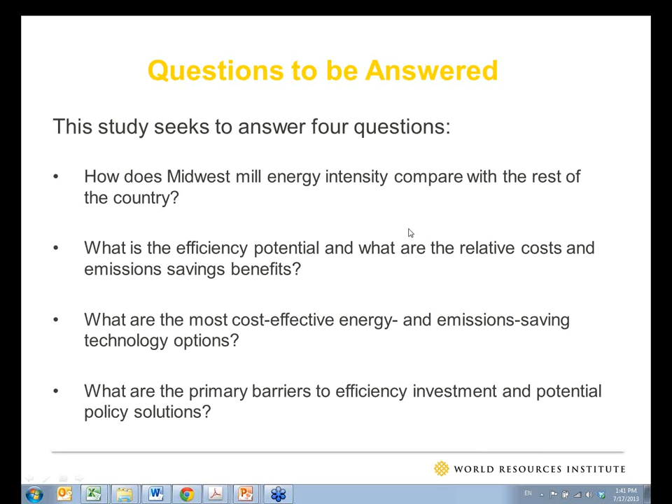And then in the last part we looked at the primary barriers to energy efficiency and the potential for policy solutions. So go to the next slide.

So for today's presentation, I already went through the questions, and then Nate will start with a bit of background. We'll go through a benchmarking and emissions inventory that we conducted based on mill-level data from the Fisher International database, and also the greenhouse gas emissions inventory from that.

We looked at the energy efficiency options, as I mentioned, quantitatively and qualitatively, and then the next part is case studies, which really present the business case to demonstrate why these efficiency options are viable and illustrate the role of policy. And then we finish with the policy landscape and a series of recommendations.

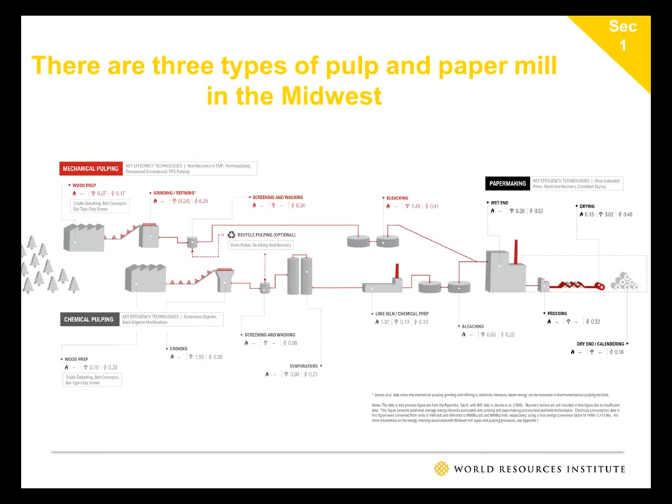So what you can see with those numbers under each process is the final energy intensity of these processes using the best available technologies. The first number with the flame is direct combustion of fuel in the facility. The second one is steam consumption, and the little lightning bolt is electricity consumption.

In terms of the questions that James opened with that we were trying to answer with this report, the basic approach that we took was benchmarking and creating an inventory of all of the greenhouse gas emissions related to pulp and paper mills in the Midwest. There are a number of known issues with benchmarking, namely defining the product or sector, the methods and boundaries that you use for calculating, the units that you use for normalization, the level of ambition for the benchmarking, and finally the data sources. So there's a lot of problems that go into benchmarking that we had to address.

The usual simplistic approach to benchmarking is just to put entire sectors together and say, well, the average intensity is this, and it'd be great if all the mills could move to the average intensity. This approach doesn't work with pulp and paper because you've got a range of products from tissue paper to cardboard to coated paper, all kinds of products. And you've also got those different production routes that I showed in the earlier figure.

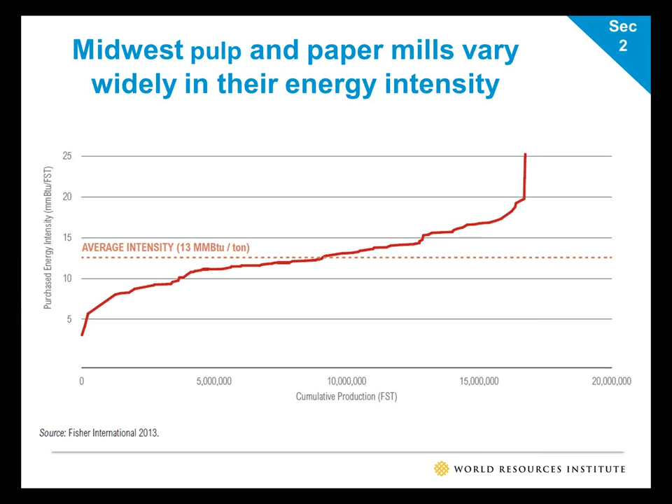So this figure here shows the range of intensities that we found among the different Midwest mills, but like I said, it's really apples and oranges in terms of showing a lot of different types of production methods together in one. So we had to figure out a way to address the large diversity of production methods for pulp and paper production in the U.S.

The way that we did that was we obtained data on all of the pulp and paper mills in the Midwest from Fisher International, and we used those data in a spreadsheet tool developed by the EPA Energy Star program called the Energy Performance Indicators tool. The EPI tool was developed by the Energy Star program based on census data that account for all of the different facilities throughout the U.S. The purpose of the tool is to separate out facilities by their production method and by the product mix, so you have more of an apples-to-apples comparison.

These EPI tools have been developed for pulp mills and integrated paper mills, so they're not available for paper-only mills. We used those publicly available EPI tools to assess the pulp mills and integrated pulp and paper mills in the Midwest, and this figure shows the results of that assessment.

The way that the EPI tool works is that a given facility enters its location, and it also enters the production amount per year for that facility in terms of different production mix, whether it's coated paper or tissue paper or cardboard, etc. It also enters the amount of energy purchased at that facility for final energy use. Once it has those data, the EPI tool gives three results.

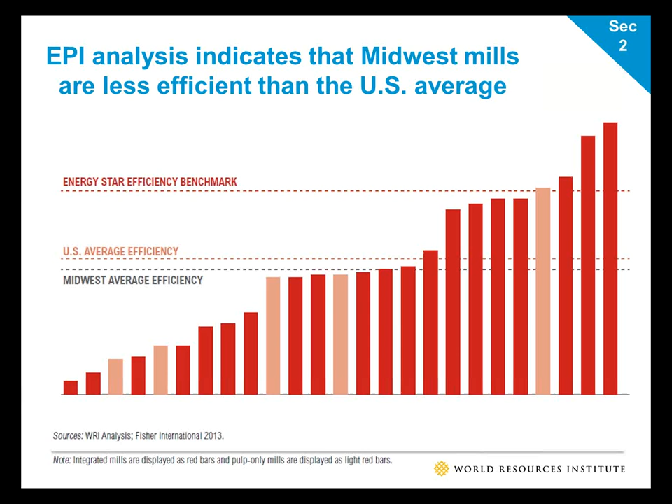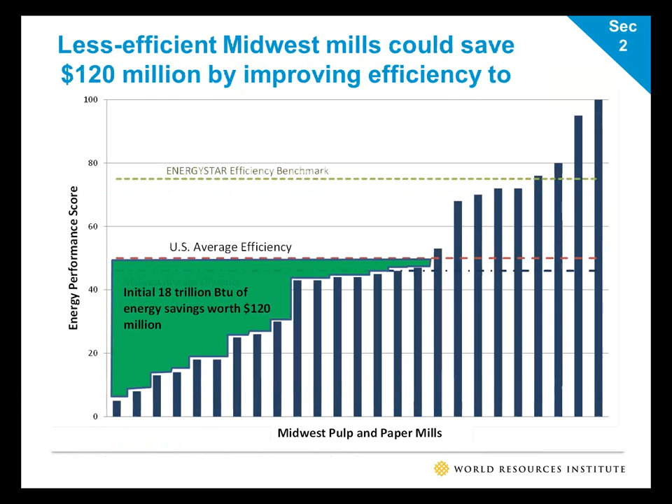If all of the mills in the Midwest that are below an EPS of 75, that is the 21 of 25 mills, improve their performance to that EPS of 75 level, the energy savings would double. So you'd have an additional 18 trillion BTU of energy savings, and that would be worth a total of $240 million per year in annual energy cost savings.

So this is one of the core findings of our report. And it shows that there's really a lot of potential for increased energy efficiency among these mills assessed against currently available technologies. And so you can see there are some mills in the Midwest that are at this level. These 4 mills up here in the upper right of the figure here. And those mills are showing that this is really possible and that these savings can be achieved.

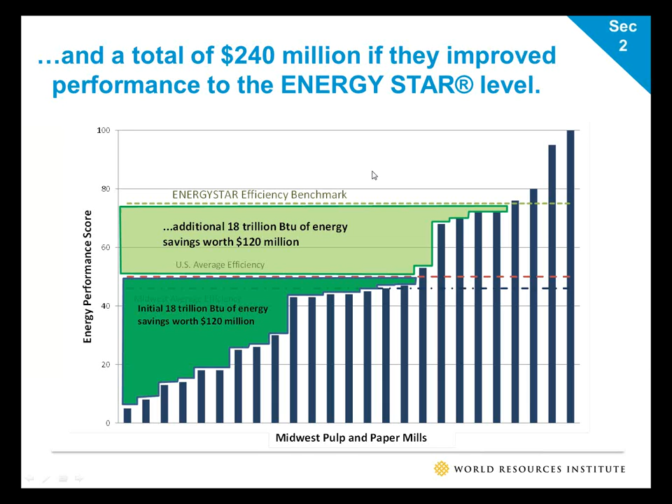Here we go. As James mentioned, the other aspect of our quantitative analysis here was to do an emissions inventory of these mills and their emissions in 2010. And so we used a tool developed by NCASI, which is a group that's related to the paper and forest products industry in the U.S. And we calculated 3 scopes of emissions.

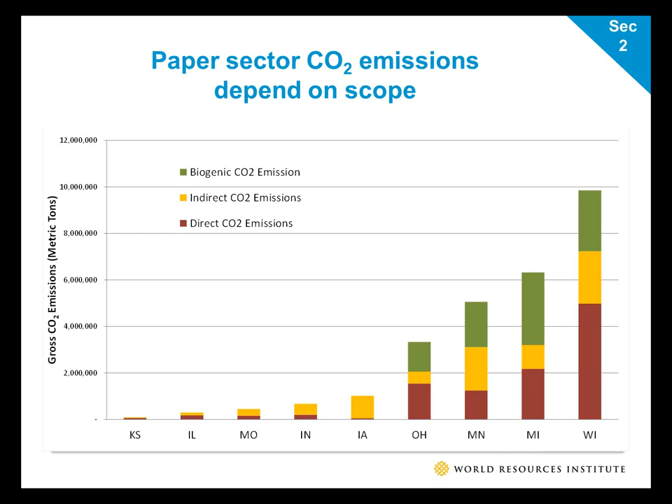One thing to note here is that on-site energy is 65% biofuel, from byproducts of trees, and so it is a very large component of overall U.S. pulp and paper energy use, but the Midwest is a little bit more fossil fuel intensive than the rest of the country, so it varies somewhat.

One of our questions in looking at emissions was, what's the impact of energy efficiency versus fuel switching? Because obviously with low natural gas prices, a lot of facilities are thinking about trying to increase their use of natural gas. And so what this figure shows is our simple analysis of scenarios here. We took the 25 mills for which we had EPI data that I described above. Only 7 of those 25 mills actually use coal or oil on site. So the rest of them have already reduced or just never did use coal or oil on site.

So among those 7 mills, if they took all of their coal and oil use and switched it to natural gas, it would reduce their total emissions by 19%. If instead of doing that, they improved their facilities so that they reached the Energy Star level of performance, they would reduce their energy use by 34% and their emissions by 34%. So this just shows that the energy efficiency potential here has large emissions reduction potential as well. These are shown separately for analytical purposes, but obviously it's great if they can both happen at the same time. That is, efficiency and fuel switching are by no means exclusive, and in fact, it's great if they go together.

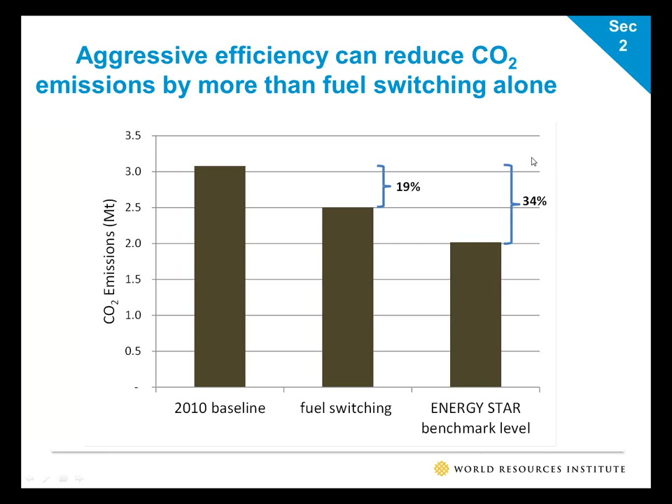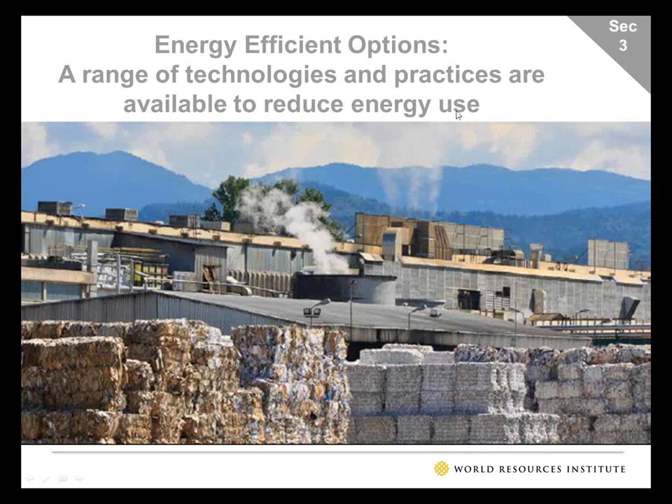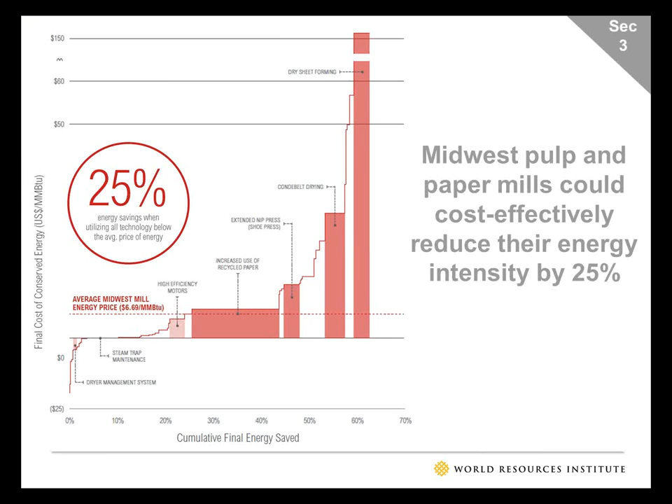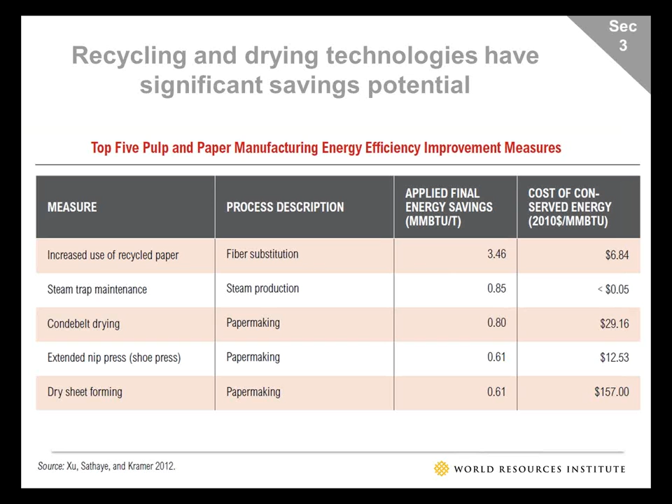What's notable about that facility? So they made a large investment in their thermomechanical pulping unit to reduce their electricity demand, and what's notable is that they were able to collaborate with their local utility, which is the Bonneville Power Administration, to really make that investment happen and to allow the benefits of the investment to be shared.

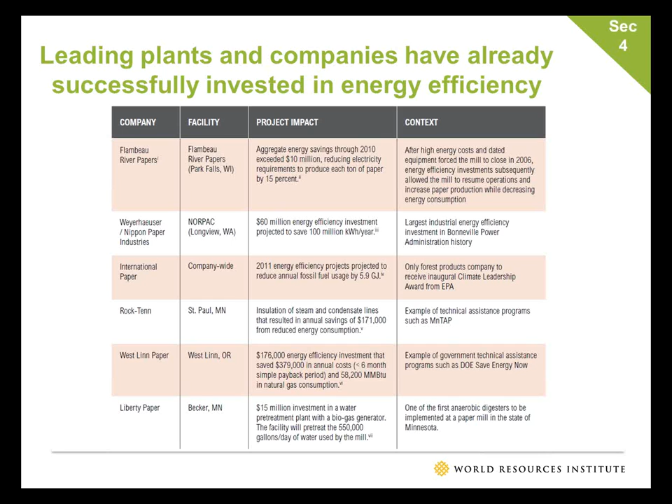Just in general, the three larger benefits that we see with efficiency investments, and particularly in the case studies, is first the jobs benefit, in that these investments can allow the facilities to successfully compete and to stay around or emerge from bankruptcy, and so obviously that preserves the jobs associated with these facilities. In the US, there are 350,000 jobs associated with the pulp and paper sector, and so this is one way to help preserve those jobs.

A second benefit is just the overall economic benefit of reducing energy costs and improving competitiveness. And then finally, there are the energy and environmental benefits of reduced energy demand and reduced greenhouse gas and other emissions. So now I'm going to turn it back to James for a discussion of barriers and policy recommendations.

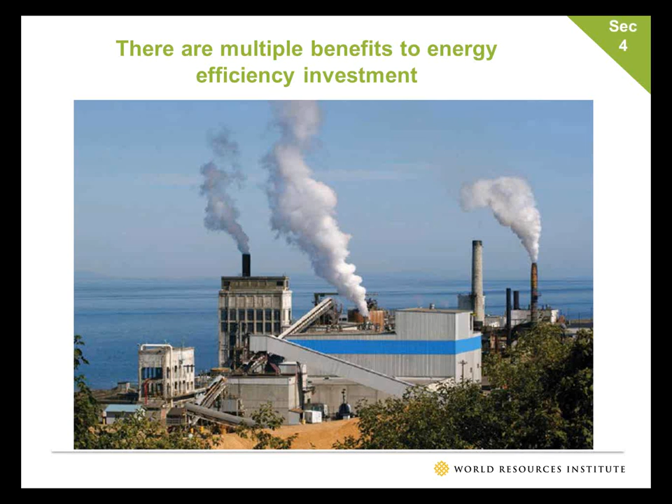Great, thanks, Nate. So the moment you've all been waiting for, the policy implications of our study. I'll be going through first a little bit of background, or I guess the landscape for policy, the policies at the federal and state level that affect this sector, and then also our recommendations and final conclusions for this study. So first, a bit on barriers.

This is pretty well-worn ground. There have been many studies and reports and anecdotal evidence that there are a couple really key barriers to energy efficiency. Everybody asks, well, if this is so cost effective, why aren't people doing it? One, of course, is in some cases transaction cost is often cited, particularly for combined heat and power investments.

The pulp and paper sector is actually among the biggest users of combined heat and power technologies because they have such a high steam or thermal load on site. They generate a lot of their own electricity and then use the waste heat for their processes. In fact, I think of the electricity that's generated on site, something like 97% of that is used for CHP. But they purchase another 35% of their electricity needs. They meet 65% of that through on-site generation.

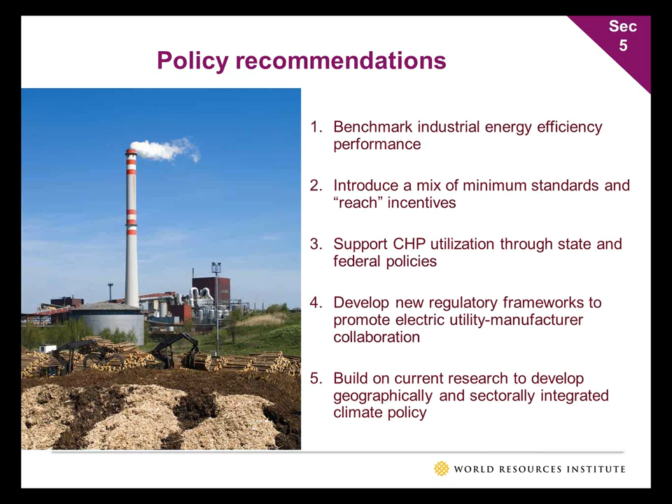And the final point is, build on this research. We would recommend more studies of this sort for other energy-intensive sectors to really get a better handle on where energy is used by which sectors, and help identify which policies can work the best to seize the cost-effective efficiency opportunities and help drive emissions down across the country in a way that recognizes the regional differences and technical challenges of these sectors, and that's a big reason why we wanted to do this study.

And so for key findings and conclusions, energy efficiency can help save the jobs in this sector and other sectors as well. Also, more energy efficient pulp and paper mills, we found, would save millions of dollars in energy costs, over 100 million, up to 200 million, while also cutting pollution, carbon emissions in particular. And the situation among these mills really reflects the choices facing energy-intensive manufacturers throughout the U.S., for reasons I described in the previous slide.

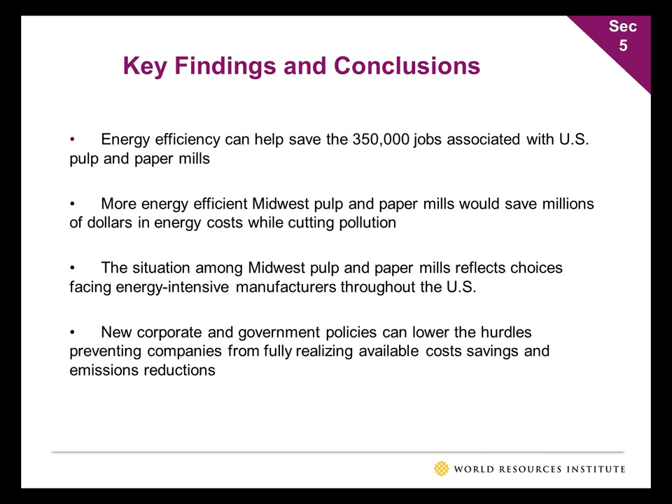And there's a lot that new corporate policies and government policies can do to lower the hurdles that are preventing companies from realizing these available cost savings and emissions reductions, whether that's incentives or regulations that make sure that new equipment is as efficient as it can be. There's really a suite of options that need to be considered. So I think we're going to go to the panel now. Sorry if I went on too much, but I hope it's useful to all of you.

Great. Thank you so much, James. That was great. We can circle back to the policy discussion with any questions from the audience, and we will also touch on it with our panelists. Again, the way we're going to do this is we're going to have 3 panelists. The first one is Butch Johnson and his colleagues from Flambeau River Papers, and they will give a presentation on their facility and what has happened recently there. So let me just bring that up.

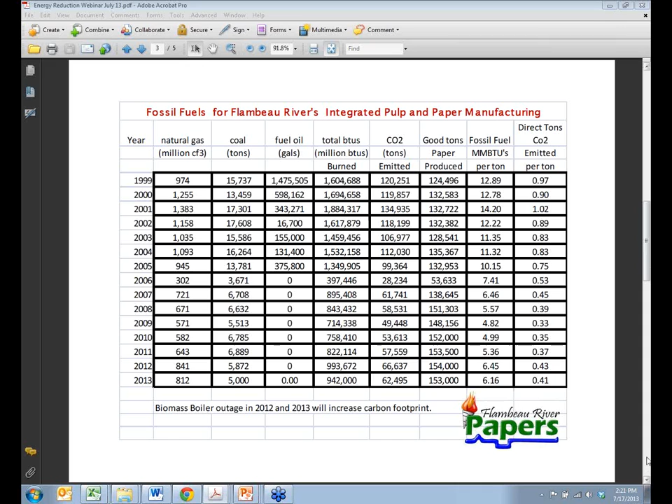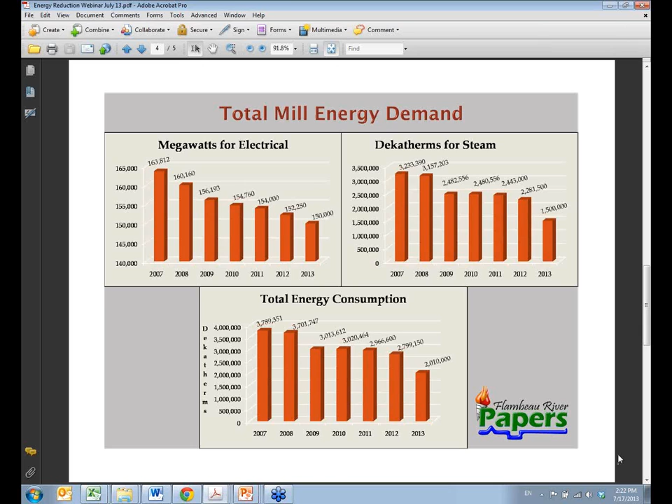I think the biggest thing that we look at is the challenges that we have, and the idea that more energy conservation can be done to further reduce our costs, we absolutely agree with. Easier said than done, especially for a small privately held company like ours that's struggling in a pretty darn tough industry that's very capital intense. So we'll just flip to the next page because I know we're under a little time here.

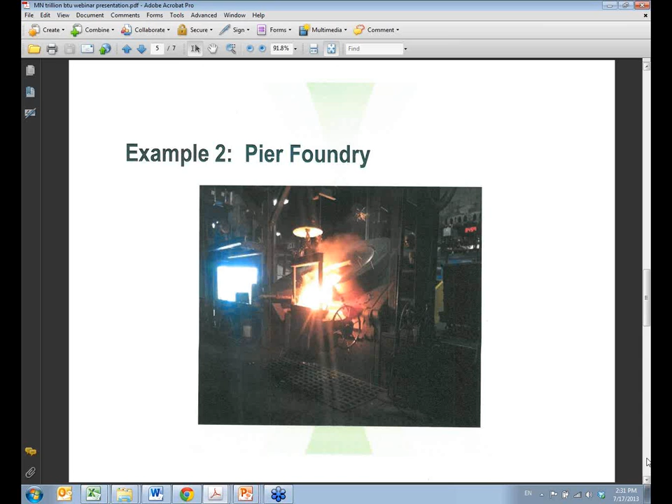The next one is a smaller foundry, and we financed a new electric arc furnace for that facility. Next slide. In this facility, it was a $1.5 million cost. The Xcel rebate is about $400,000. We financed $1.5 million, and when the rebate comes in, it'll pay it down again dollar for dollar. No money up front for the business. It's positive monthly cash flow of about $1,000.

The furnace that we replaced, somebody would come in at midnight on Sunday, and 8 hours later, the furnace would be ready to go. And with the new furnace, it takes about 20 minutes for the startup. In addition, they've doubled their capacity, and they've, I would say, tripled their workforce. When we first met with them, it was about 40 employees, and now they're well over 120. So it's been a great job creator, and actually, without that, the 40 existing jobs may not have been around. Next slide.

So the Trillion BTU fund has been out there for about 3 years. We've financed about 38 projects, $23 million. We've saved on an annual basis over those 38 projects 135 billion BTUs. We've improved 10 million plus square feet. Retained or created 582 jobs, and created 238 construction jobs.